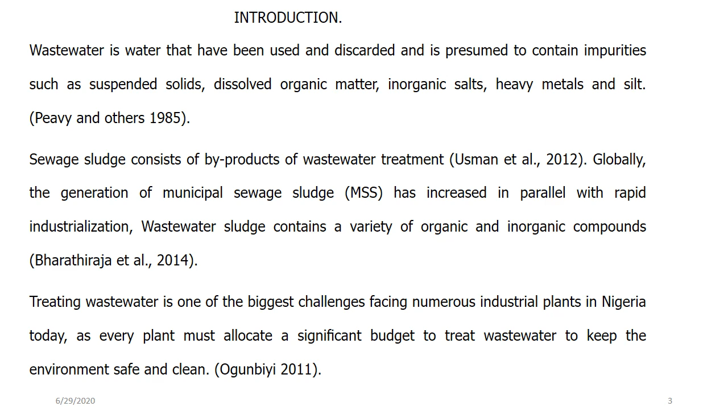Biogas is a gas obtained by anaerobic decomposition of organic waste such as vegetables, plants, crop residues, human and animal waste, and consists of methane as a major component, with impurities such as carbon dioxide, nitrogen, hydrogen, and hydrogen sulfide. Biogas is somewhat lighter than air and has an ignition temperature of approximately 700 degrees centigrade. The main constituents of biogas are methane and carbon dioxide gases. Biogas burns very well when the methane content is more than 50%.

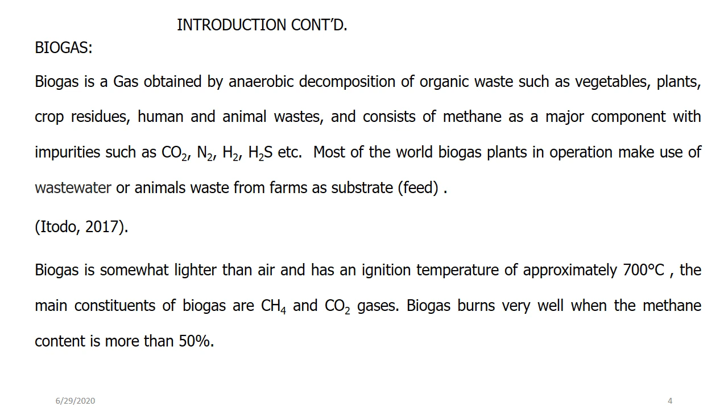The following are uses of biogas. It is used for running internal combustion engines to generate electric power, for cooking and lighting, as automobile fuels, as fuel cells. It is used for the production of chemicals. Residual sludge from biogas production is used as organic fertilizer for agricultural purpose. According to the work of Igboro SB 2011, biogas conserves natural resources, such as trees cut to get firewood.

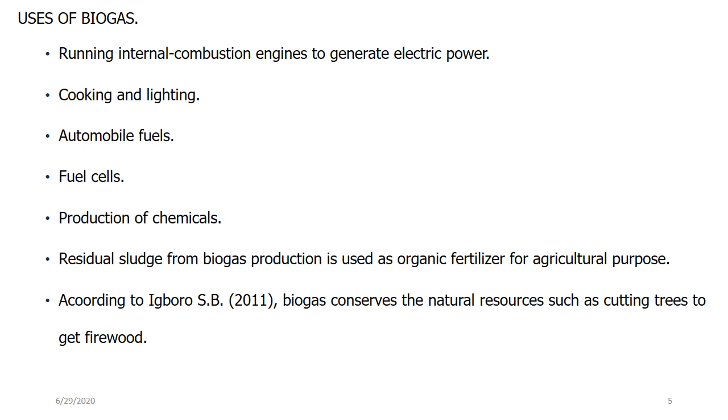Materials and methods used for the research. The materials and equipment used for the research include a glass beaker, digital pH meter, oven, thermometer, weighing balance, incubator, glass rod, Lovibond apparatus, and Kjeldahl apparatus.

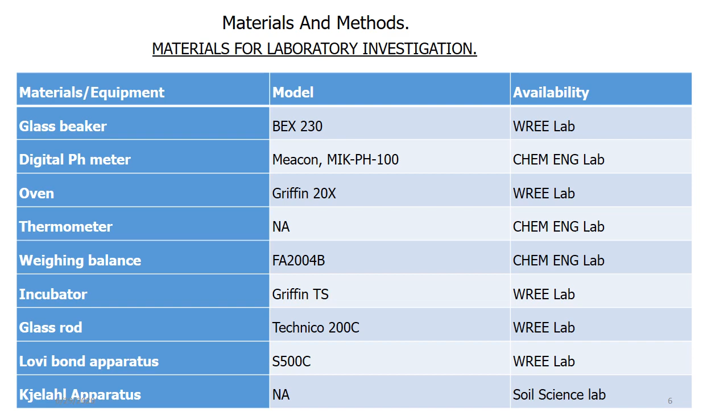Also, the following equipment was used for the research: a 3-liter bioreactor, which is locally fabricated by the researchers, a 1-liter graduated beaker, 10-liter plastic buckets, a 5-kilogram weighing balance, disinfectants, soaps and detergents, as well as surgical hand gloves.

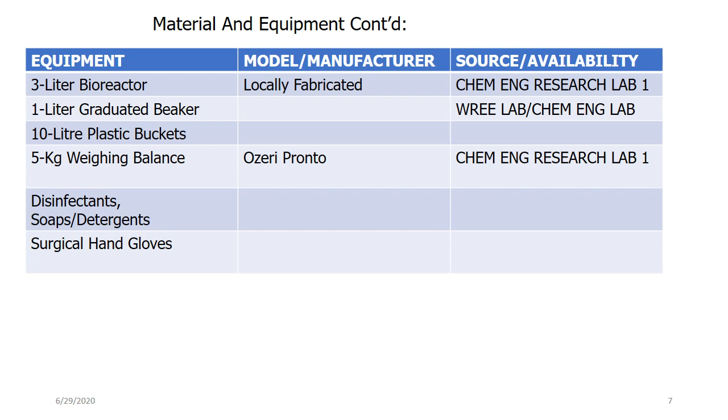Figure 1. Methodology for the research. Characterization of Ahmadu Bello University wastewater and sewage sludge. This involves sample collection, sorting and composition analysis of the sample.

Hence, characterization of the wastewater and sewage sludge into their individual components using criteria such as dissolved oxygen, biological oxygen demand, chemical oxygen demand, ammonia, total dissolved solid and total suspended solid, as well as determination of moisture content, ash content, ultimate analysis, proximate analysis, biological oxygen demand, chemical oxygen demand, total suspended solid, and volatile suspended solid.

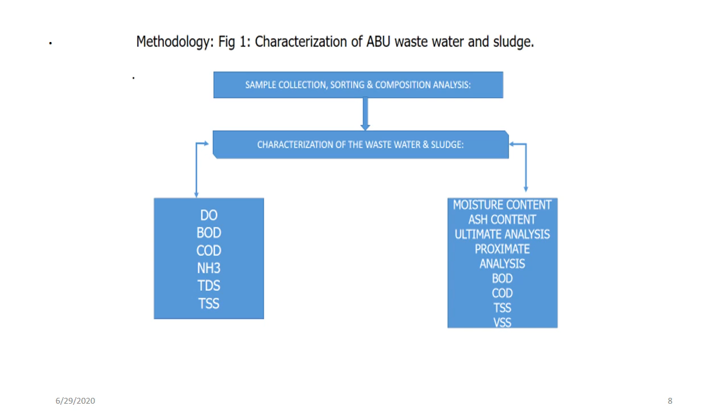Continuation of methodology used for the research. Figure 2 shows procedure for biogas generation from Ahmadu Bello University Wastewater and Sewage Sludge Treatment Plant. The procedure involves literature digest on lab-scale batch reactors, including kinetic data generation, construction and fabrication, as well as setting up a lab-scale batch reactor, biodigester loading with wastewater and sewage sludge in mixed and appropriate ratios, biogas generation and data recording, as well as data analysis.

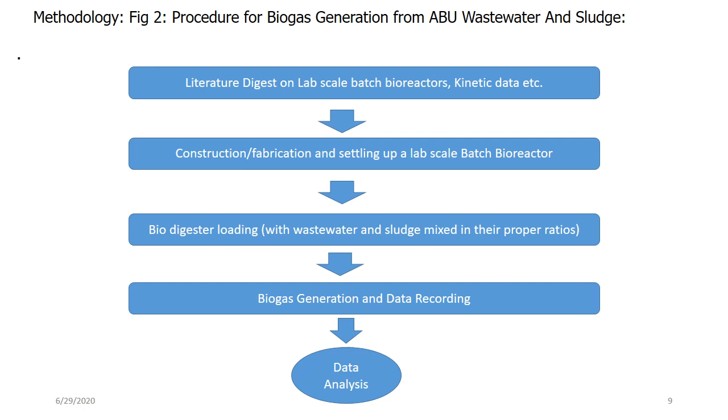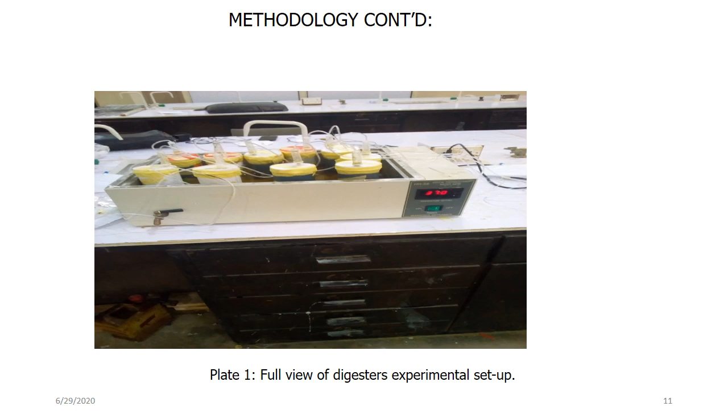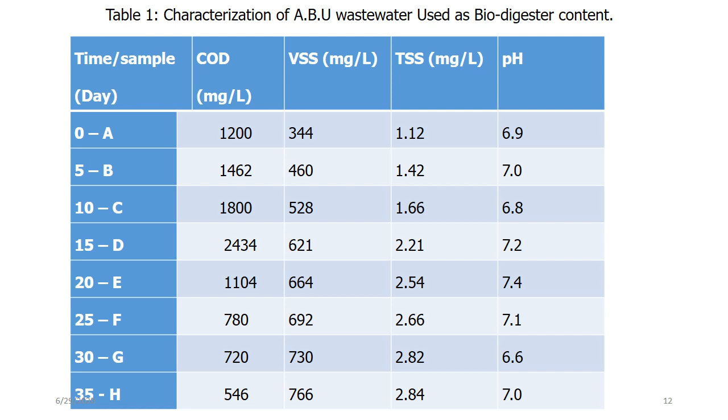Results of the experiment. Table 1 shows characterization of Ahmadu Bello wastewater used as biodigester content. Continuation of results gotten from the experiment. Table 2 shows the volume of biogas produced daily, including daily production of biogas and cumulative volume of biogas produced after 5 days. Also recorded in the table is the pH of slurry before digestion, as well as pH of the slurry after digestion.

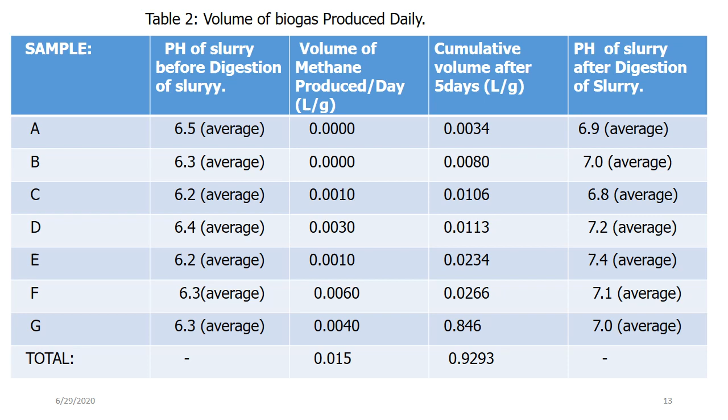Continuation of the results gotten from the experiment. Table 3 shows characterization of the substrate and comparison with the digestates with retention time for biogas generation. This table shows the substrate percentage composition as well as digestate percentage composition with percentage increase and decrease where applicable.

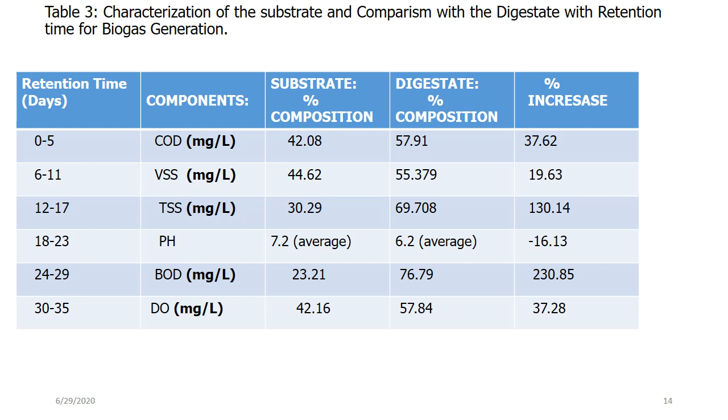Figure 1 shows daily volume of biogas produced across the bioreactors. The volume of reactor content across reactor A to G is recorded with the corresponding volume of biogas produced across each reactor over a 5 days retention period gotten before each reactor is dismantled.

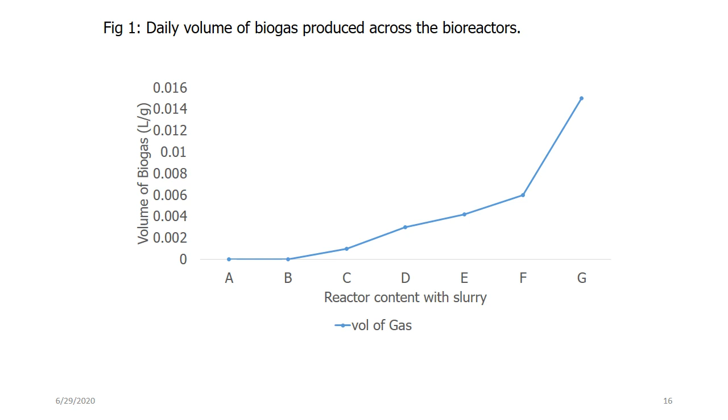Figure 2 shows the relationship between solid retention time and digestate. The solid retention time and the concentration of digestates were plotted, and the relationship that exists between the two shows a straight line downward sloping curve.

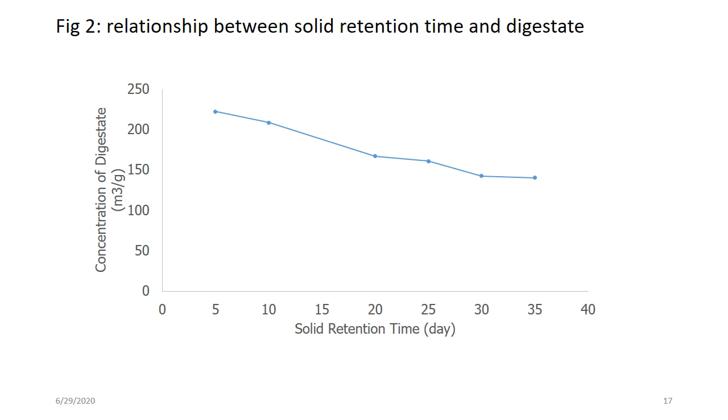Figure 3 shows total solids utilization for the substrates digested. The reactor content with slurry across reactor A to G is plotted against the total solid generated, and the square of the correlation coefficient is noted. The equation describing the process being experimented is also recorded.

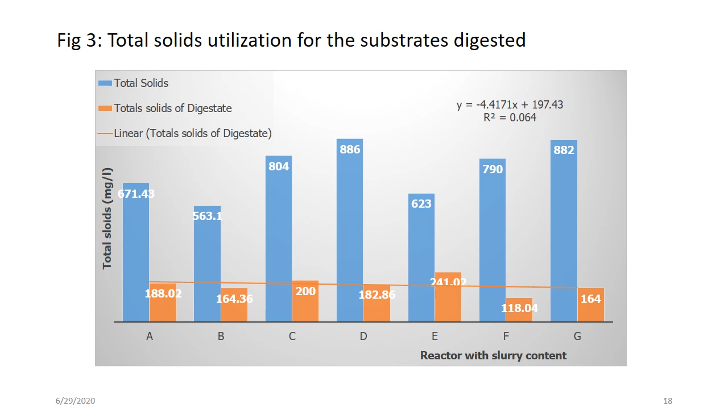Discussion on results. Figures 2 to 3 show the effects of heating and retention times on the volume of biogas production from the feed materials. According to Rajendra and others 2014, hydraulic retention times vary between 20 and 100 days for mesophilic household digesters. Studies, however, show decreasing hydraulic retention time from 90 days to 60 days, and the biogas production from this experiment showed the good quality of combustible biogas heat.

From the plot of figure 3, there is a significant difference in the retention time and their interaction. There was significant difference in the gas volume at all retention times investigated for 8 hours and 16 hours heating times. The highest gas volume produced was 0.929, obtained over heating time of 8 hours daily for a retention time of 30 days. Whereas the lowest biogas volume was 0.0034 cubic meter, which was obtained for conditions of less than 8 hours heating time and a 2-day retention time.

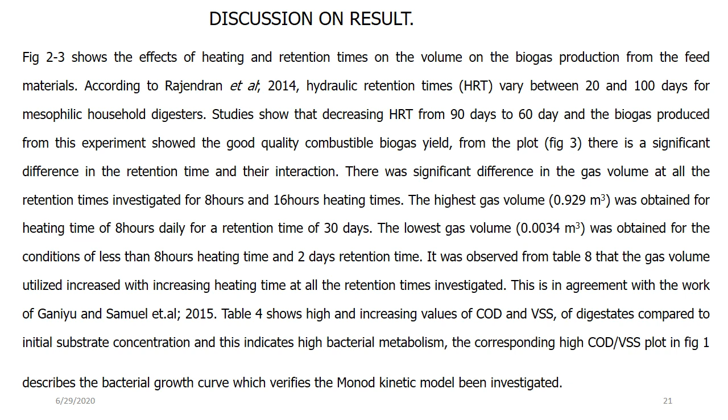From the foregoing, the Monod kinetic model seems to be more appropriate based on the experimental data fitted, and as such, table 9 shows the design parameters for the batch anaerobic bioreactor from the experimental data. The volume and capacity of the tank, the total solid content of the substrate, the solid retention time, the pH value of both the substrates and the mixture, the temperature of the bioreactor and heater, the mass of volatile solids, as well as the density of the substrate to be loaded, the density of water and the specific tank operating pressures are part of the design parameters for the batch anaerobic bioreactor gotten from experimental data.

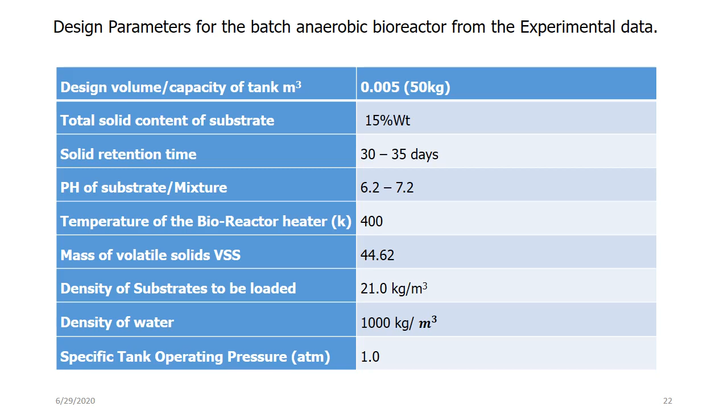Conclusion and recommendations. Conclusion. From the experiment conducted so far, it can be concluded that the percentage weight reduction in volatile suspended solid and chemical oxygen demand were 19.62 and 39.63% respectively of the substrates generated within Ahmadu Bello University after digestion of the slurry, and this indicates the activities of microorganisms, which is decomposition of substrates, and it is also a manifestation of production of biogas. And the cumulative volume of biogas produced was 2.31 liters per gram.

The flammability of the produced biogas portrays 50% or above presence of methane in the produced biogas. Hence, it can be concluded that Ahmadu Bello University wastewater and sewage sludge can potentially produce biogas in high quantities, given favorable conditions for the anaerobic reactions to occur. Also, the Monod kinetic model was more appropriate when experimental lab data of chemical oxygen demand and volatile suspended solid were fitted into the empirical models of Logistic and Contois model to predict the cumulative volume of biogas.